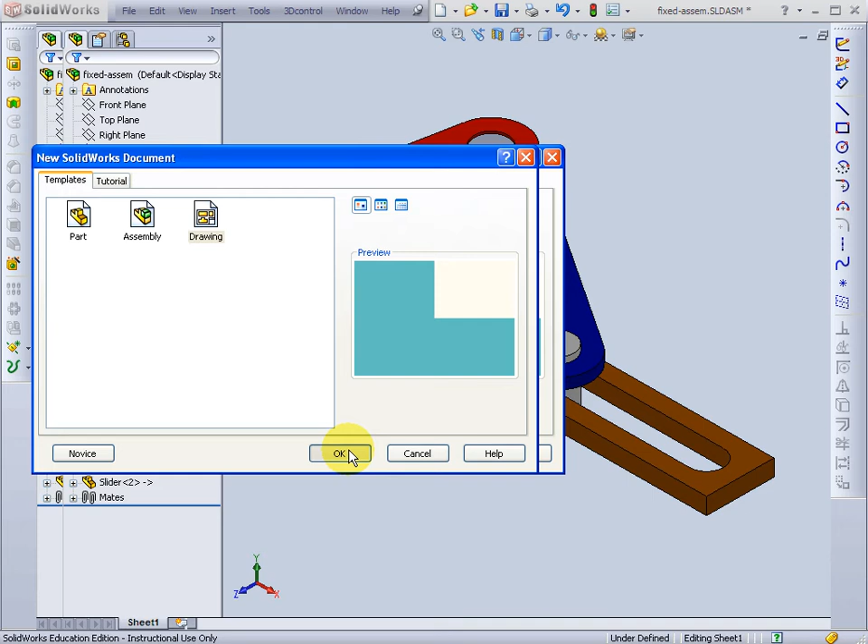So here I have my basic slider crank mechanism again, and I'm going to try and make an engineering drawing of this red crank shown here. So I'll go to File, New, I'll create a drawing, choose one of the default templates, I'll browse for the part to insert, choose the file of the crank, open.

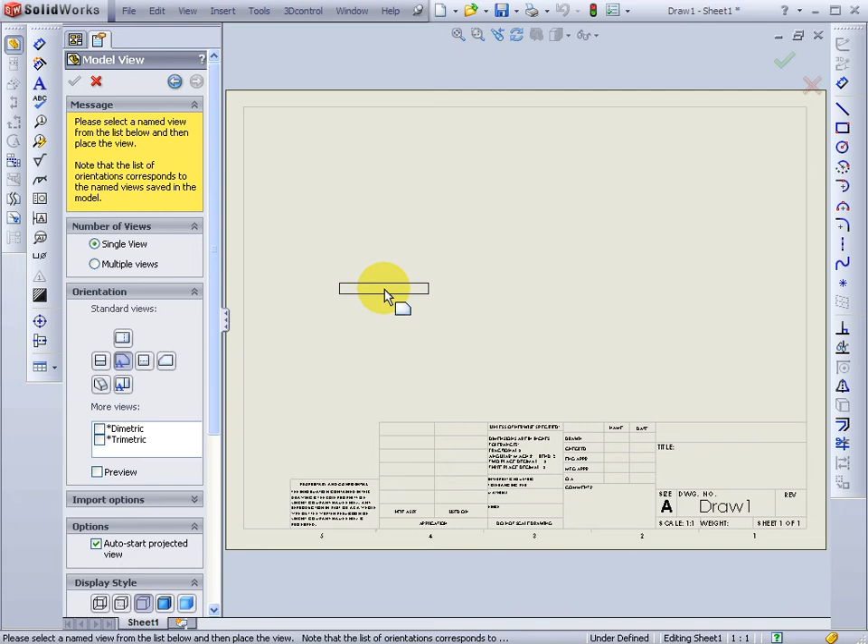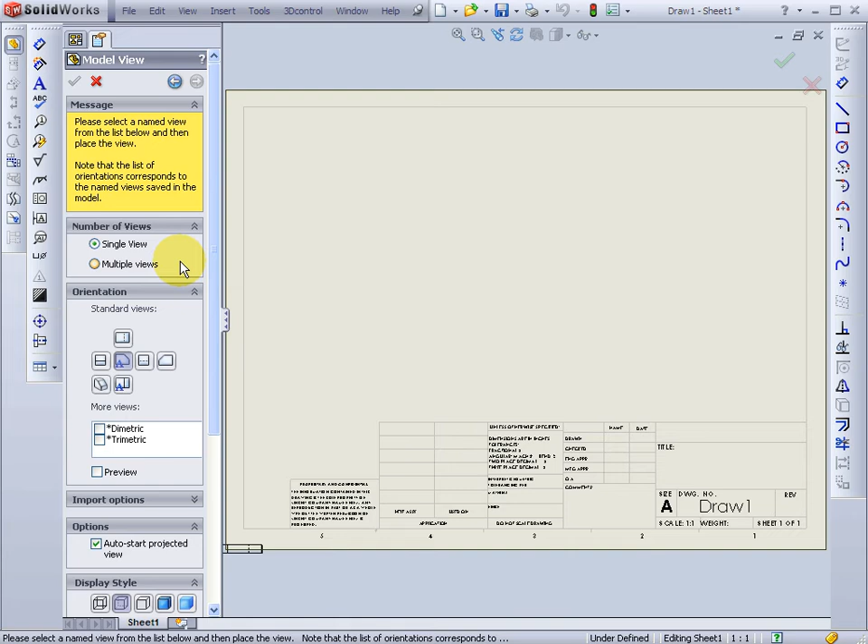I'll start off showing a single view. Down in the options for display style, I want to show the hidden feature lines. So I'll choose that box. Now I'll place the views on the sheet. There's one, there's two, and I'll put in an isometric as well. Press the check mark here, or the check mark over here to accept.

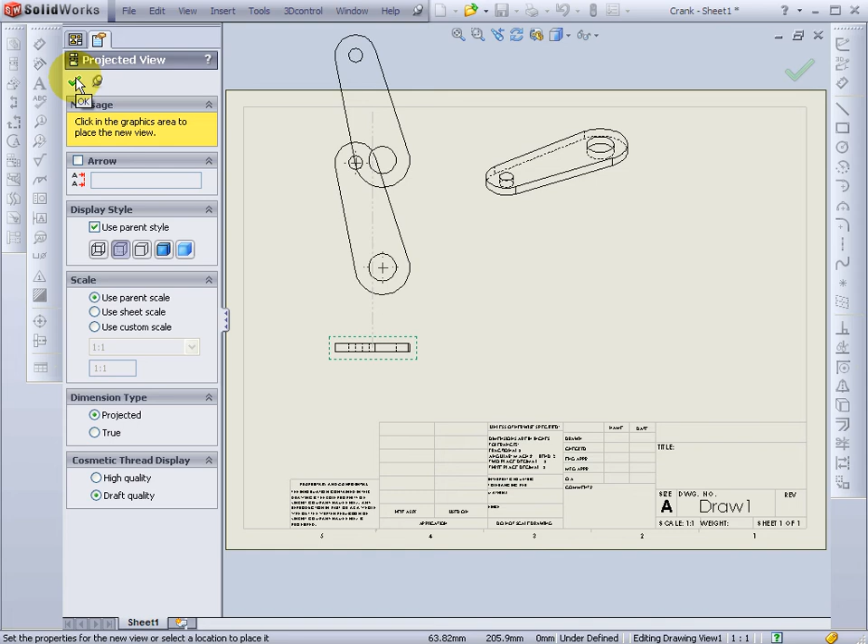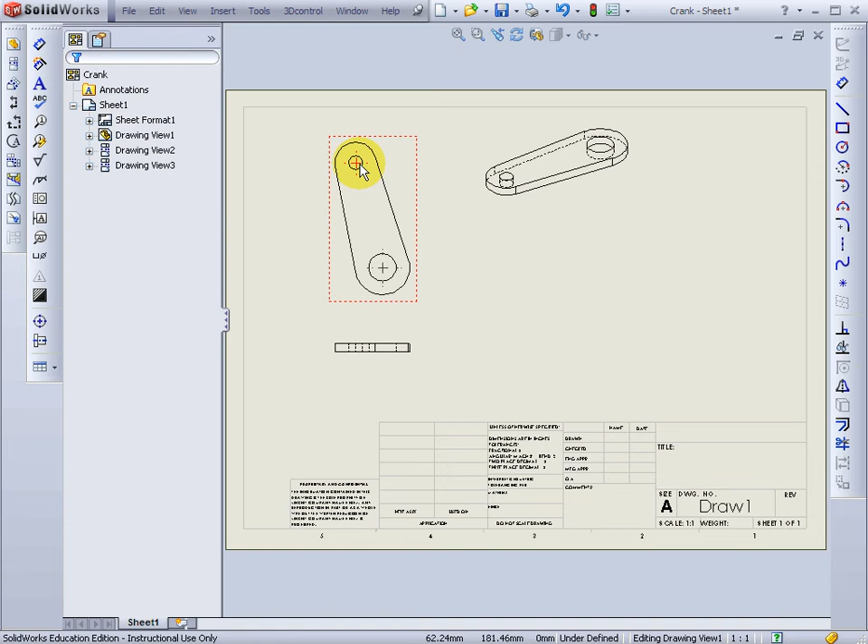Now you notice when I brought this part in, this crank here is on an angle. I want this to be vertical, so the line connecting these two holes here, I want that to be vertical in my engineering drawing. To do this, I'll have to go and realign the part in the assembly. So I'll go back to the assembly,

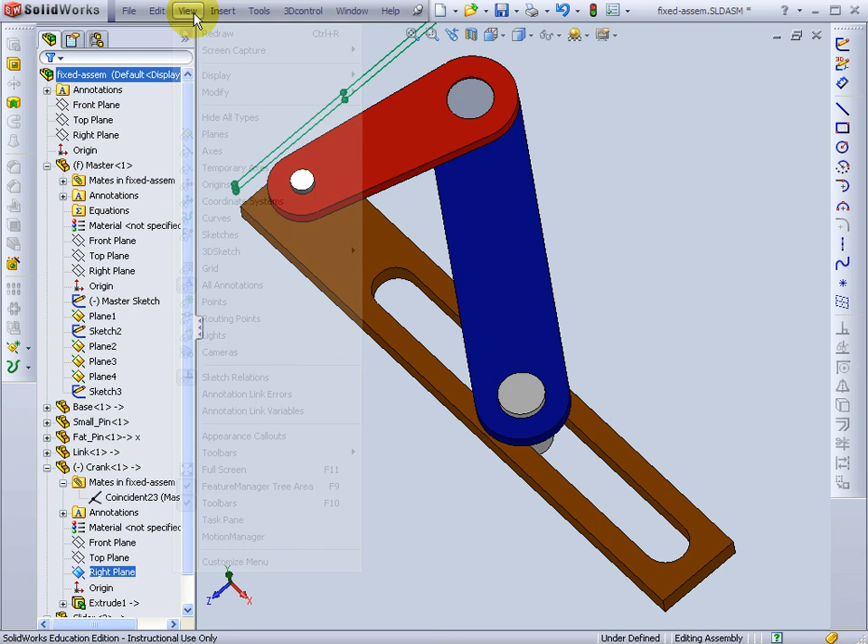and here in the assembly, if I expand the crank in the feature tree, you can see that this right plane here is at an angle to the crank. So the right plane of the crank is at an angle to the actual link here. So I'll change this. I know this crank is based on the geometry of a master sketch. So I'll go View. I'll show the sketches here so I can see the master sketch.

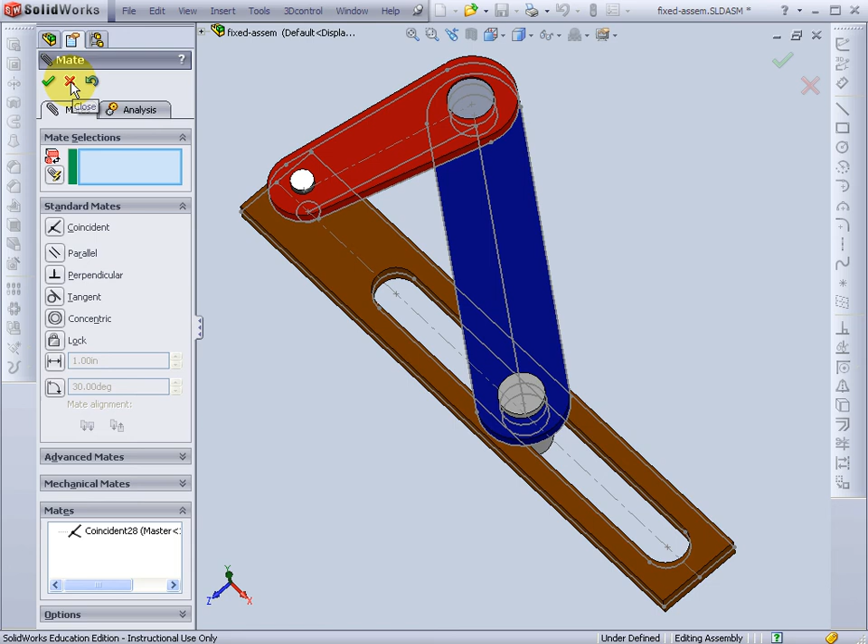This line here is a line in the master sketch that defines the slider crank mechanism. So I'll choose that line, and I'll select this right plane of the crank, and I'll mate them together so that the right plane is coincident with that line of the master sketch. I'll accept this mate, and I'll hide the sketches again so it's more clear to see.

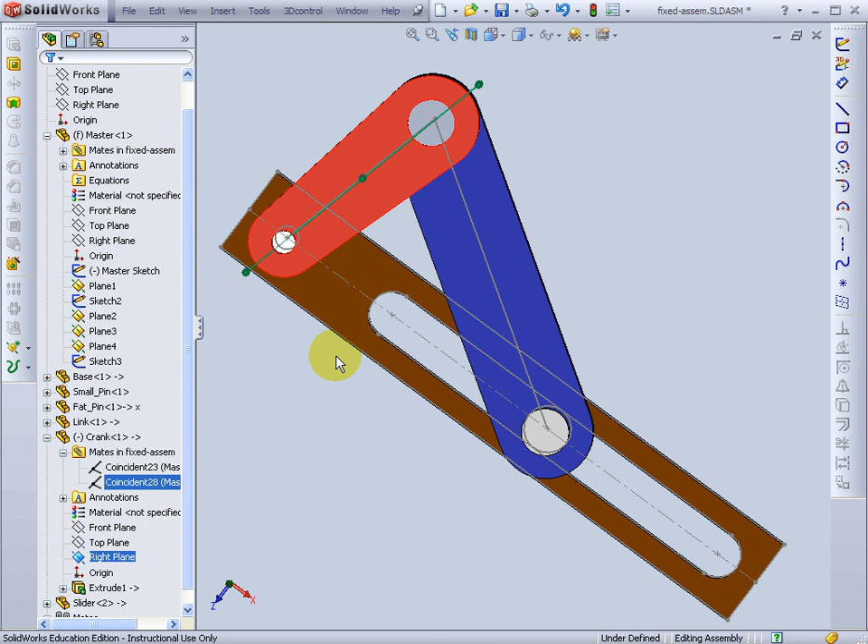Now here you can see the right plane of that part goes right through the center of those two holes. Now if this geometry of the crank was not fully defined by the master sketch, you would have seen some of these lines and curves of the crank have moved, and you'd have to go back and edit the crank part, look at the extrude, edit the sketch, and fix up this sketch to get back to the geometry you want. But since I've properly defined this part based on a sketch over here that's in the master, I don't have to go and do that.

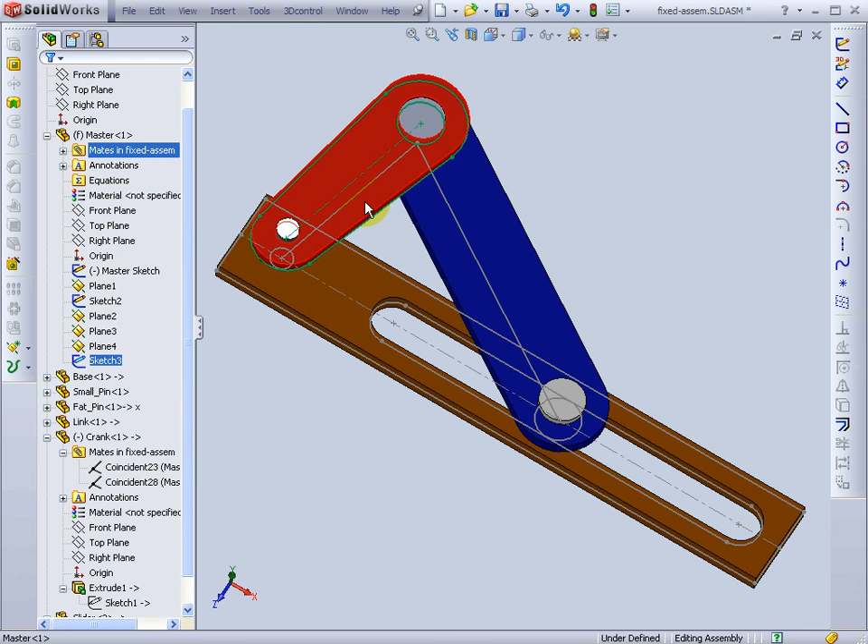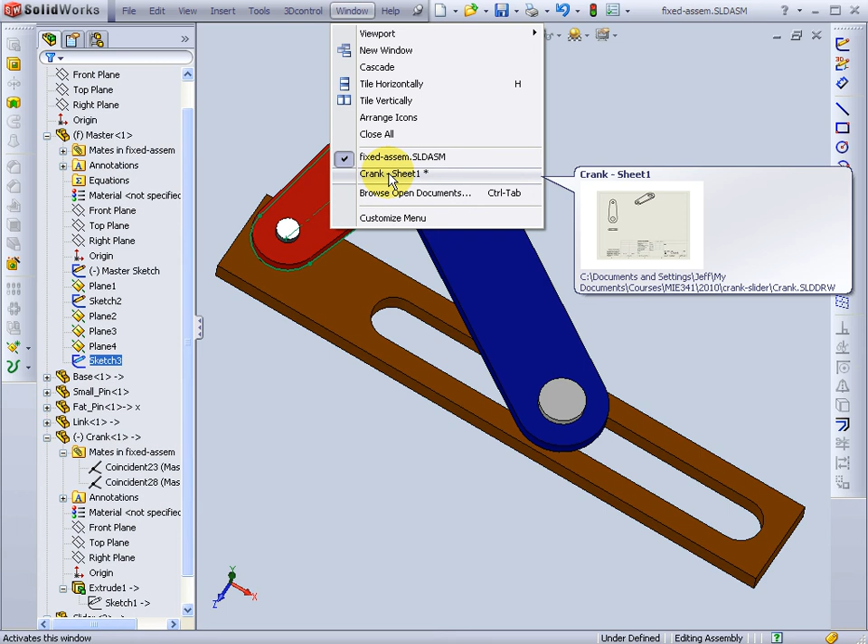So I'll go to File, and I'll save everything right now. It's asking me to save the crank drawing because I haven't saved that yet, and I'll certainly do that. Now I'll go back to the drawing, and you can see now back at the drawing, this crank here is vertically aligned, now that I've adjusted the part.